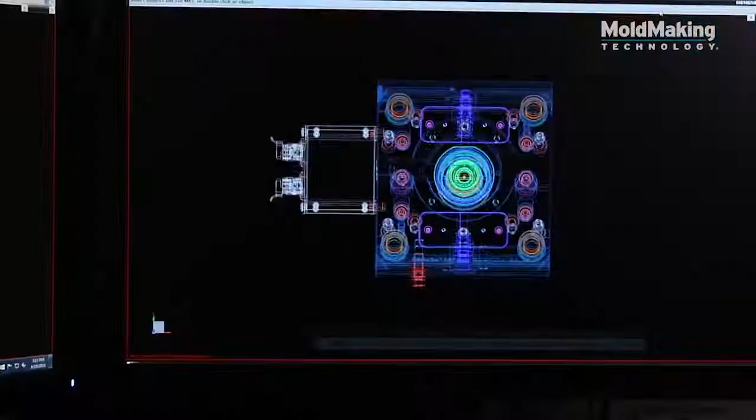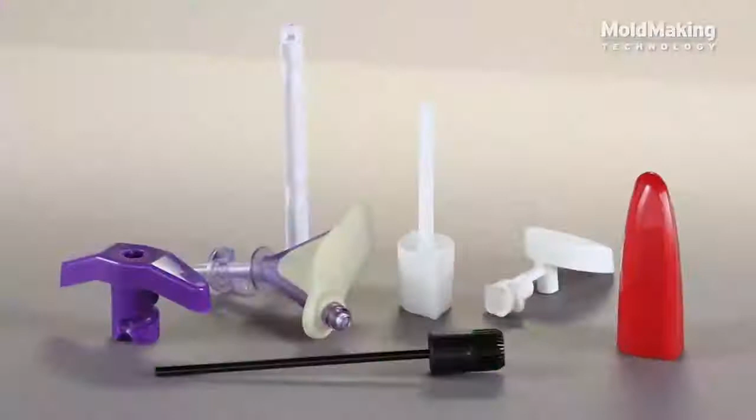We consider ourselves running a metric-driven business that just happens to build molds. My name is Don Smith. I am a general manager here at Graphic Tool. We serve a variety of sectors, which include beauty, dispensing, packaging, and RX packaging.

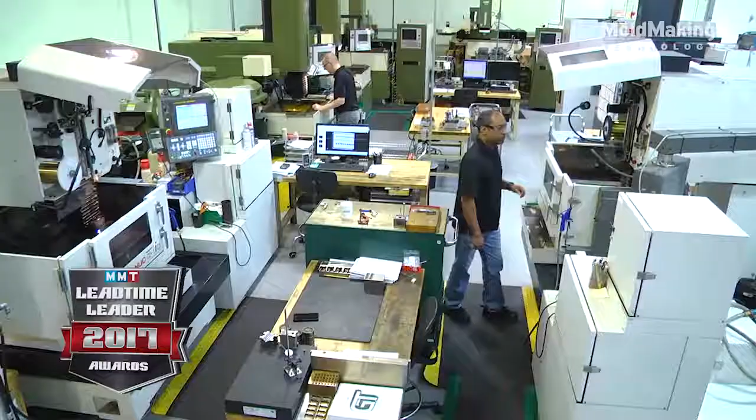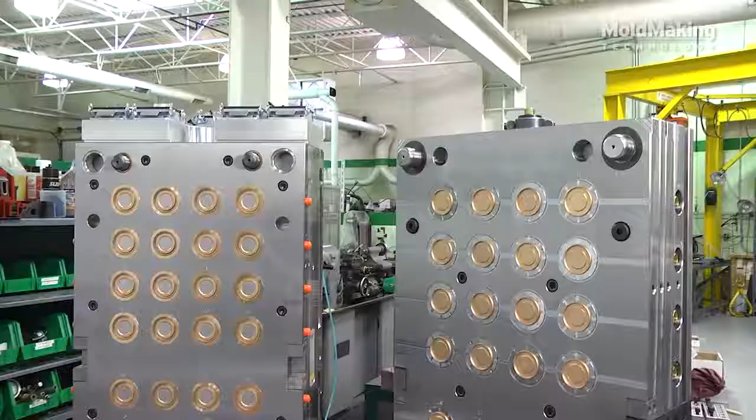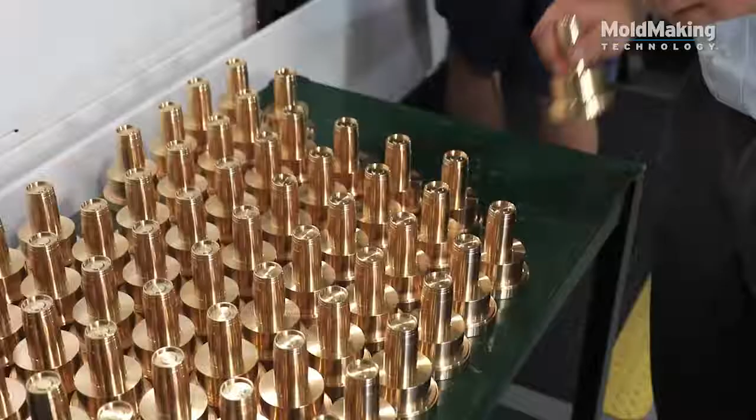We defined what types of customers we wanted to go after simply by our strengths, identifying those weaknesses, and then partnering those people up. Again, we don't go after customers with those short life cycles, for example, automotive, but tools that last a lifetime, and then we stand behind those tools. That's where we see where we can problem solve for our customers on a global basis, and they trust us to come back here to build their components, and we service it through the life of the mold.

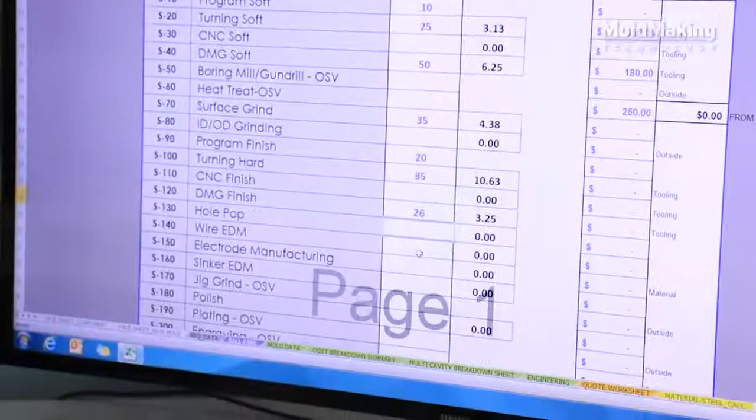Here at Graphic, we've created a quoting software system based on experience over my 20 years. We can quickly generate 3 styles of quotes: a ballpark quote based on ratios of historical data, and also drill down deeper where we can take those ratioed quotes and then go into an actual planning stage. Finally, when it comes all the way through, we can track it, and that gives us more data points for

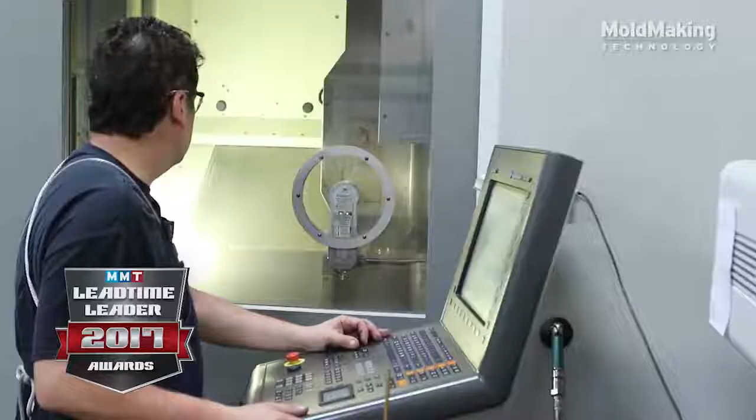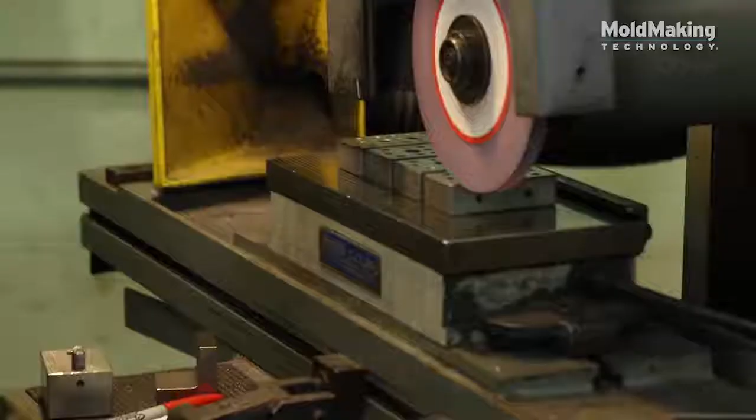the future quotations. And really what we're building is knowledge along the way, and then looking at it from a lean standpoint and continuous improvement, what things we can use to get better. And also, most importantly, is to look at what we did well on that job and how we can turn those into best practices. So we're using the contemporary business philosophies of capturing KPIs, driving our business through the numbers. Again, it's a metric-driven business that just happens to build molds.

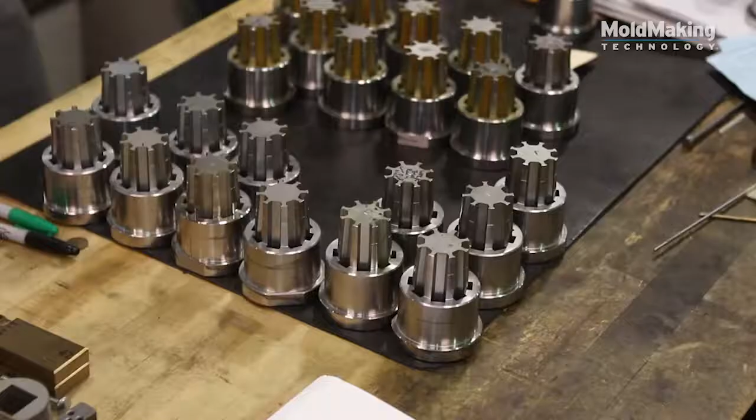We like to say that we build the Formula One types of plastic injection molds, which are high cavitation, interchangeable core cavity inserts, which means that you can take a component from a mold we built 5 years ago, and we can build a replacement component without having to return the mold to us for any fitting. It's totally designed and built within tolerance and manufactured within those specifications.

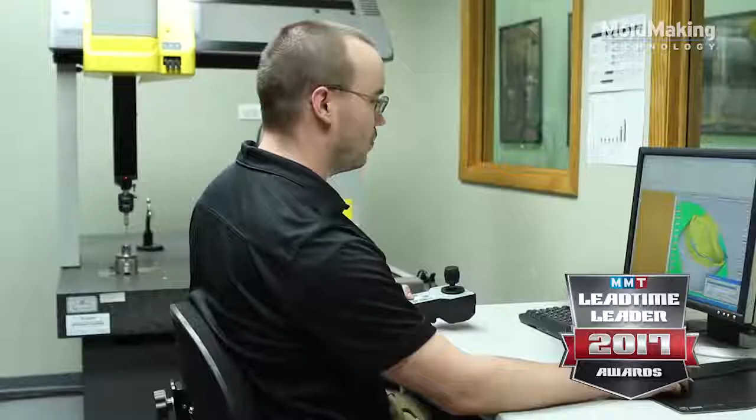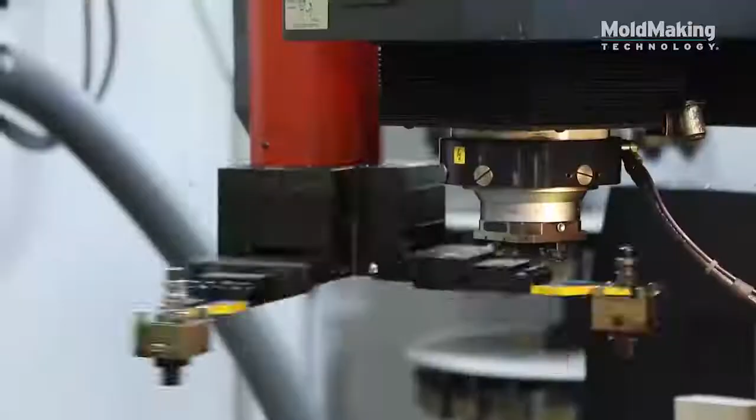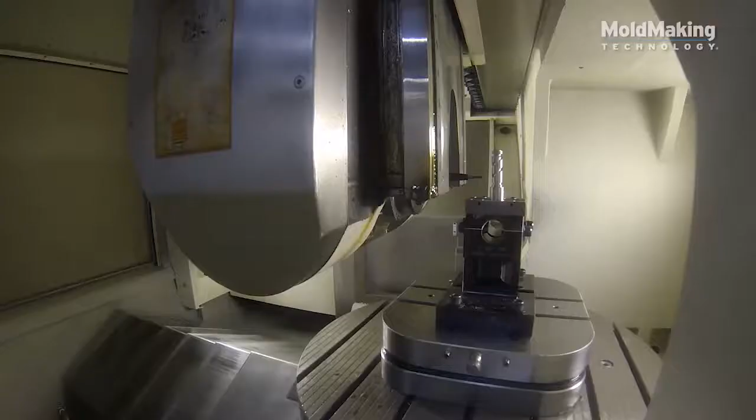Some of the technologies that we use here at Graphic Tool to reduce our lead times: since we've identified our customers as far as high cavitation tools, we've invested heavily into automation. So with that said, we've adapted certain techniques. For example, we have a 5-axis machine on the shop floor that's fed by an articulating arm robot. We don't do 5-axis machining, but we do 5-sided machining, which thereby takes the labor out of the equation, reduces setup times, which in turn reduces lead times.

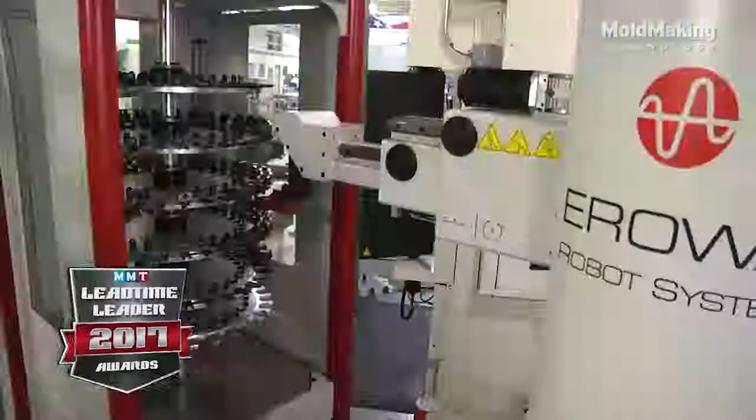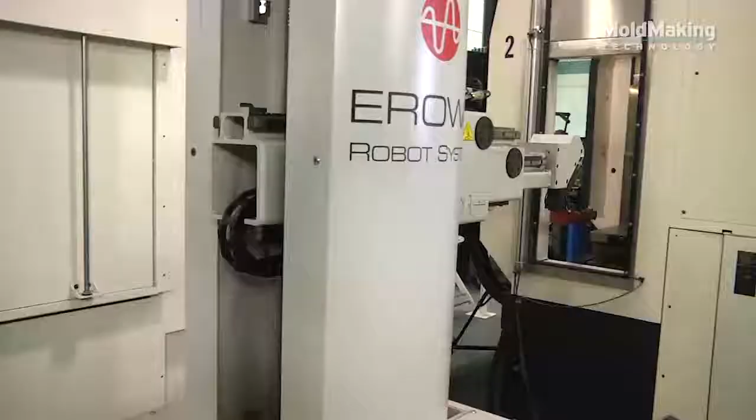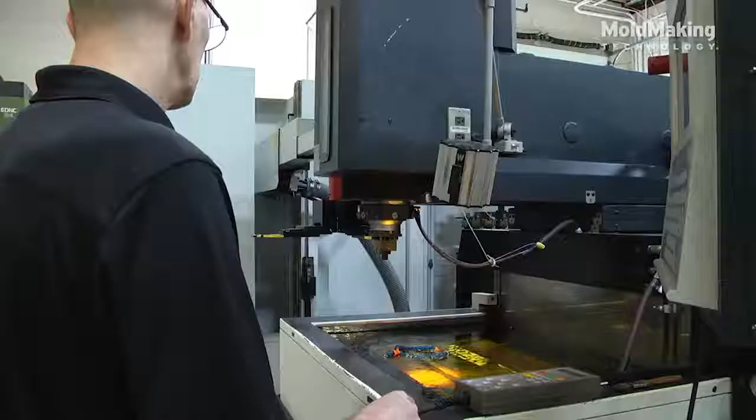We also have our automated electrode cell, which has 2 machines fed by an Erowa robot, which has RFID chips that are inserted into the pallets. The electrode manufacturing system is an automated system. Every electrode within Graphic Tool is run through that electrode cell. So we do not have mold makers or machinists on the shop floor creating their own. It's a strictly controlled process. Every electrode is 100% inspected.

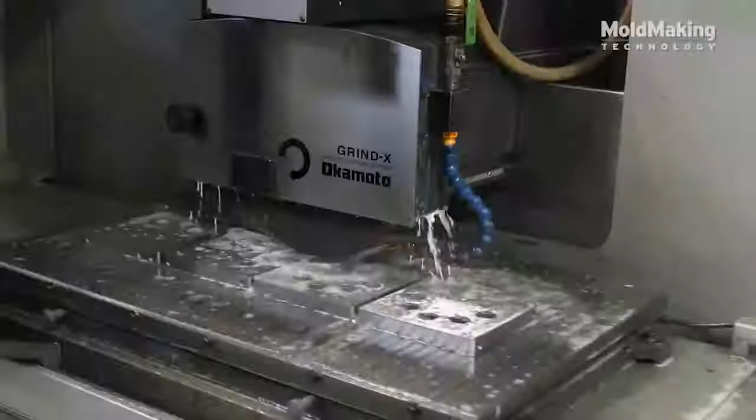Today's environment is now called mold manufacturing, which is a process-driven environment. So instead of just designing a mold, what we truly want to do is engineer the mold based on data, based on engineering principles, based on mold analysis, in order to achieve a Formula One race car type of mold. At Graphic Tool, we're becoming process-driven, changing the culture from a mold making environment to a mold manufacturing environment through our lean and continuous improvement, and we strive for the relentless pursuit of perfection.